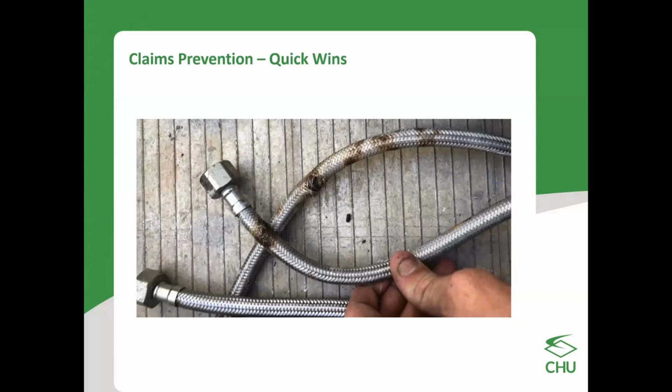Gutters and valleys, and basically hydrology - making sure they're doing what they're designed to do, free from build-up, able to flow. Very common things - many have frequent maintenance plans, but check them after big storms. If you've got trees around, don't necessarily wait for the next scheduled maintenance, step it up and prevent that next claim.

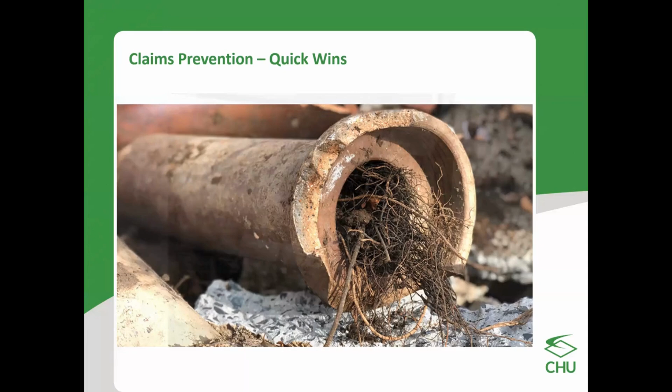Tree roots - we love trees, trees are beautiful, but tree roots in sewer pipes particularly are not nice. They're a frequent thing that my loss adjusting team and our building consultancy team go to. And despite what anyone says, having sewer flowing through your house is quite disgusting. I know that's probably controversial for some, but yeah, I never enjoy it, no, we don't.

Also manage balconies - if anyone's discovered someone who builds a balcony that doesn't leak, either from design or waterproofing, etc. They need to drain, and the more clutter that's on them, like leaf debris, particularly in a large storm event - I've seen this at many loss adjusting jobs. When you consider a tall building with driving sideways rain, that facade becomes the roof, in essence catching all that water. So the step up between your balcony area and the inside plays into how well your drainage will be.

If there's no step up, Chris, you've got a choke point - a drainage point that's small or infrequent, which can get blocked and minimize drainage, and that's an invited claim. The biggest thing we see is pot plants - people putting pot plants over drains. You'd think it'd be simple to avoid, but it's often the cause, someone liking the place for the plant and popping it there, turning their deck into a swimming pool. We love plants, absolutely love plants, in the right environment - but you've got to maintain it. The policy is there to respond in a storm situation, but do you want that?

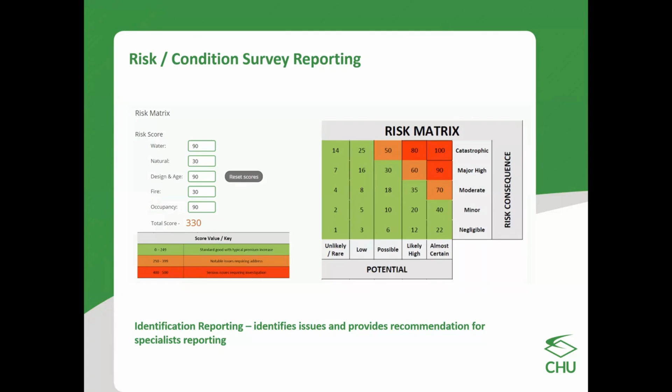But Chris, if we start to step through the slides, it'll give a bit more of a breakdown. I don't know if we're issuing this after, because there is a lot of content in my slides. What I would ask, Penny, is if you want, you can either say next slide, or you can go bing. Yeah, either way—I don't know how I'll go at the bing, but okay, how about I have a go? As long as it doesn't sound like I'm doing that partway through.

So what are we looking for? Like I said, water is the first big thing we're always looking for, because we want our buildings to be watertight and healthy. Chris talked about flexi hoses, aged pipes—that's a huge one. It's just maintaining those things, changing your flexi hoses regularly. People aren't totally accustomed to that sort of thing. I had a friend who did a whole lot of work on their house, and he was actually a plumber—he went away but hadn't checked his flexi hoses. Yeah, devastating. So drainage services, sewer services...

Doors and windows. Now when we talk doors and windows, we mean that they're flashed correctly, they're watertight, there's no leaks around them. You often don't see those issues till there's a directional rain event. We constantly go to properties after a big storm event, and at a certain elevation, often the east elevation where the weather's driven from, it's actually been able to come through doors and windows.

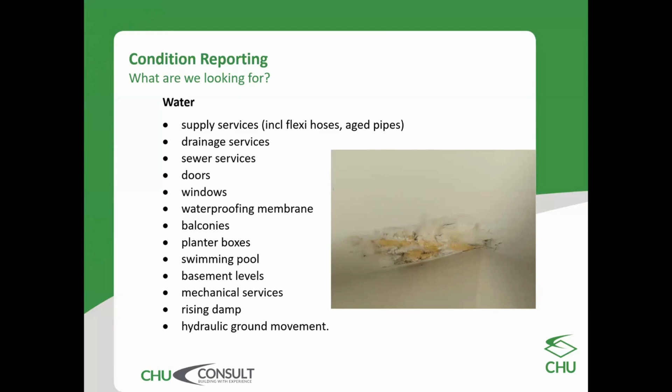So I'm going to go Bing, Chris. Not as exciting as you did it though.

Natural - so what is the property exposed to? Cyclonic storm elements, WA, Kalbarri, we had roofs off over there. We've had it with Debbie in Queensland years ago, so just being aware. Nothing against Debbie, but we have had it with her - that was my introduction to this side of the industry.

Exposed to localized storm events, salt-laden air, so just deterioration of things if you're in coastal areas, which a lot of us are on the east coast of Australia. Being aware of the corrosion that is caused, particle pollutants in more commercial areas cause erosion and corrosion, and localized flooding. We see flood maps, but there can be flooding in other areas too now, with the amount of weather we're getting.

Bushfire, high wind forces, landslide, mine subsidence, snow loading, and large trees. These are all things we look at - if there are large trees adjacent to a property, we make a note on it, because they can cause such damage in storms. I've had a job where a tree fell at the back of the property - to get that tree out was next level, the way it was leaning into it. So it's just pruning, maintaining, clearing, keeping things well maintained.

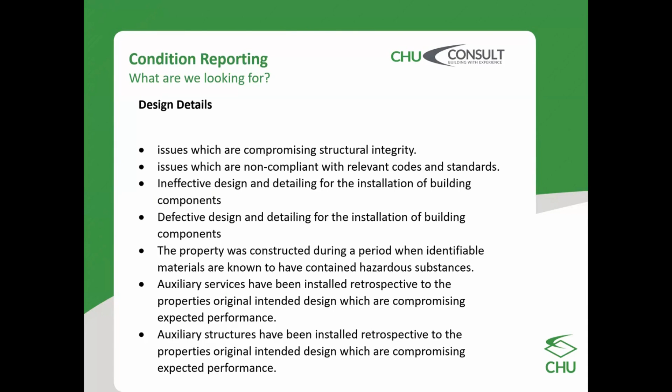That's probably all I need to talk about on that slide. So I'll bring up the next one, Chris.

Fire. What are we looking for with fire? The first thing is that the stratas are looking after their own fire safety and maintaining it in that space, getting the relevant checks and sign-offs when it comes to fire. If we identify issues, I've got a whole list of things: active fire controls, fire extinguishers, fire hydrants, fire blankets, sprinkler systems, alarms, fire dampers.

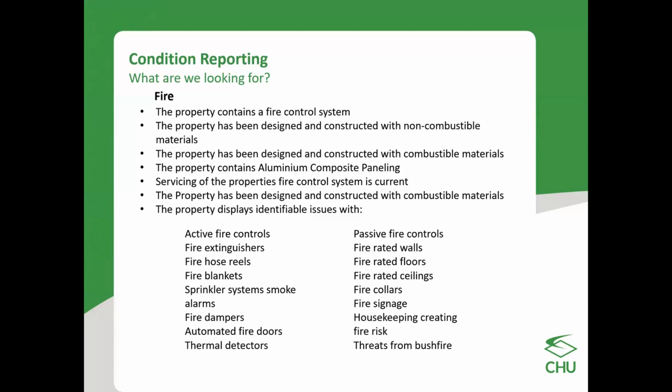In buildings, fires, in building classes, I get excited about things. You do, I know. In the class of building we're working in, 2 to 9, there's a lot of different requirements. The big thing is to make sure you have a working fire system that is being maintained correctly when it comes to fire. We've been to properties where their fire system isn't working - that building gets a red straight away, it's an emergency, get someone out there and sort it out. So in this condition reporting, it's identification to then recommend specialists to move on to next steps.

So Chris, last time, if you remember, he tested me in this space, and I said please don't do that again, because I'll probably forget again, which is really bad. Never throw you under the bus, Pen. Yeah, I'm glad you didn't.

So what items are priority? Watertight and structure. Sounds simple, not as simple as it sounds, but it is simple to identify and start a process. As long as you are pointed in the right direction, and you understand a bit of a program of works to maintain the building, it is simple.

How do I manage this? Identification - like I keep banging on, this is what we do. Specialist engagement - so we recommend the specialist. If it's a hydraulic issue, it's a hydraulic engineer; structural engineer for structural issues; fire engineers for fire issues. We'll identify the actual issue and then call out the specialist in that area. From there, that specialist, or the specialist working along with a builder or a trade, can develop a scope of works.

I always say methodology and program are massive in managing works. It does seem to be a bit of a missed area in building these days - people just do the bare minimum and don't think about the rest. So it can make a massive difference in cost. The money spent in that method and programming is just a huge element.

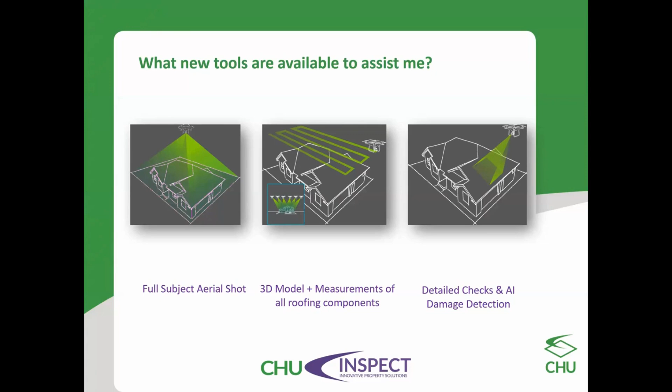I'm just going to skip through these as a heads up to what's to come, because we've got a further webinar hosted by Andrew Bond, who heads up our CHU Inspect business, where we use drones and internal LiDAR devices. The quick nature of it is we look over roofs to identify issues and aid in damage identification and scoping, which turns into pictures, automated dimensions, and volumes that can be applied in both the claim space and the capital works space. We're doing this work both within claims and via builders out in the strata space for large works and issues of maintenance.

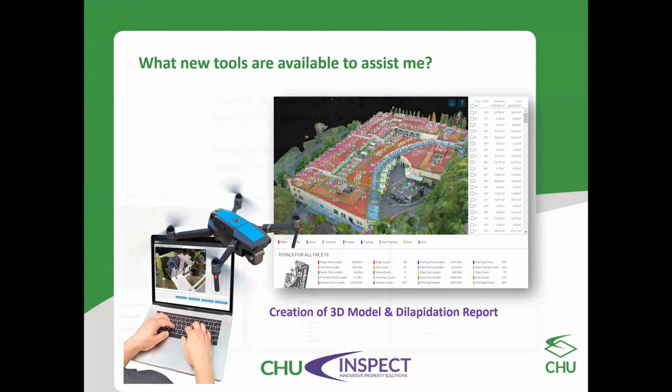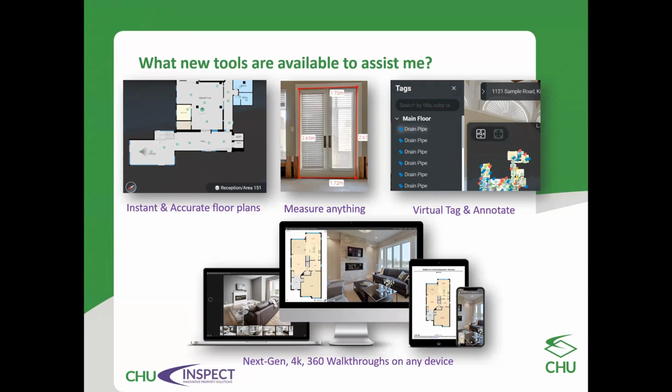These are the kind of images that come up. There's some machine learning to identify issues, but all this is required to be reviewed by qualified people to deliver this. This is an internal, floor-based LiDAR camera that both takes 360 images and bounces lasers around a room to measure it out, giving floor plans and building what's generally referred to as digital twins of buildings. So this kind of work is best left in the hands of qualified specialists.

I know we've got a bit more time left in the hour, and there's been many questions raised throughout. So I'm hoping there's an efficient way to draw particular ones to our attention, aided by Daniel, Megan, and Zoe. Is there particular ones that have been highlighted that you'd like to throw up?

Question for Penny: does CHU have a comprehensive checklist that can be sent to our strata clients to do self-checks? We don't have one currently, though our report does generate a checklist. It's something we could look at, Chris. It's a good point—CHU are very active in future projects, always rolling and looking at disruption aspects of the business as well as emerging opportunities. There's a lot of activity in that space for developing tools and services on this topic, so watch this space. Yeah, I do too, it's a great question.